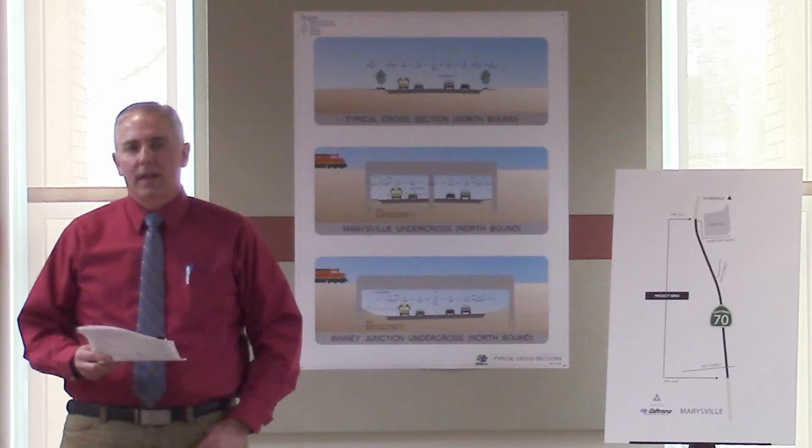I appreciate you tuning in today and watching this presentation. Our goal is to give you some information about this upcoming project and the alternatives that we have so far developed, so you'll understand as a community what those impacts are to the local businesses, the residents, and those people traveling along the state route. So thank you again for your time.

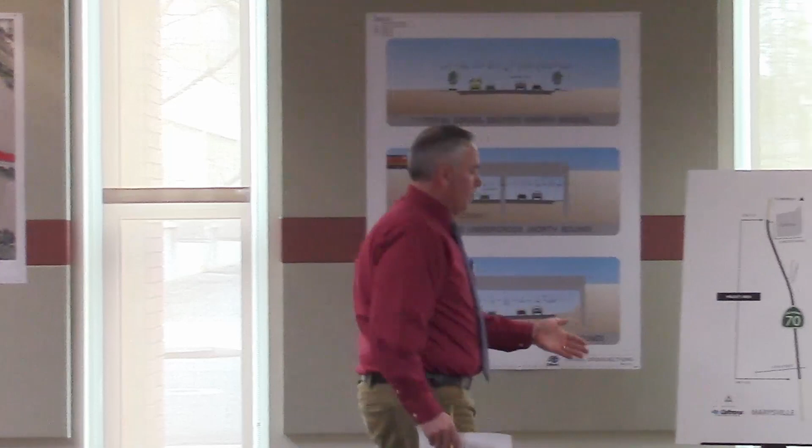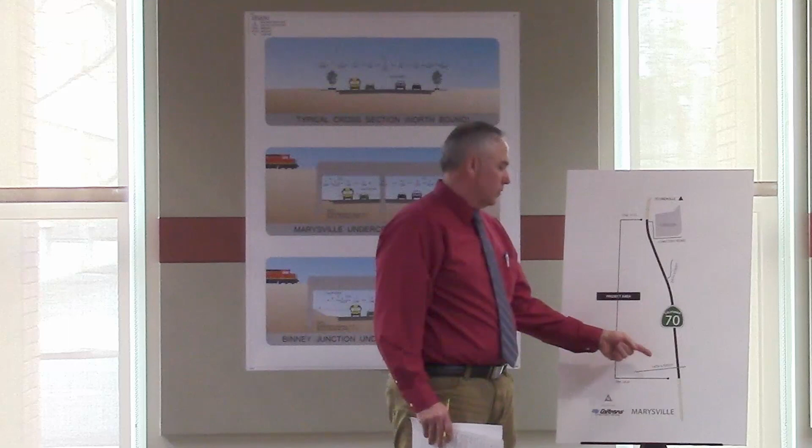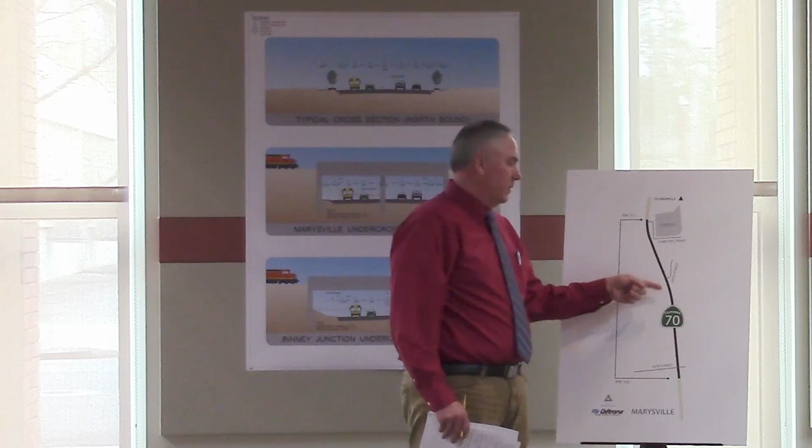So at this time I'll go over the project, where it's located, and the alternatives that we have. This display shows the project limits. It begins just south of 14th Street, where the baseball field is currently, travels north underneath the Marysville undercrossing, the train trestle, or the can opener as it's often referred to. It goes past Marysville High School, the Allen Scott Youth Center, Yuba Sutter Transit, and then underneath the Binney Junction undercrossing. It goes up the Finger Levee and ends just north of the Marysville Cemetery Road access.

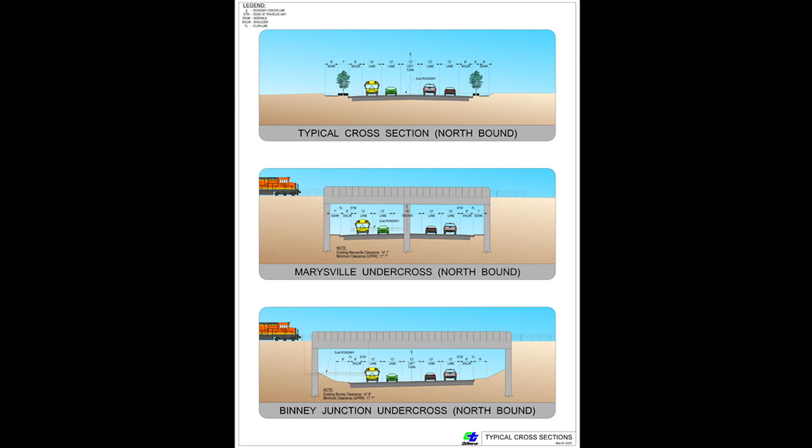So let me give you a general look at the project. The project is going to make operational improvements by having 5 lanes. Currently there is 1 lane in each direction, so we will be adding a 2-way left turn lane, 2 lanes northbound, 8-foot standard shoulders, and 6-foot sidewalks, and then 2 lanes southbound, 8-foot shoulders, and 6-foot sidewalks. We will be replacing the Marysville undercrossing, the can opener, the Marysville train trestle.

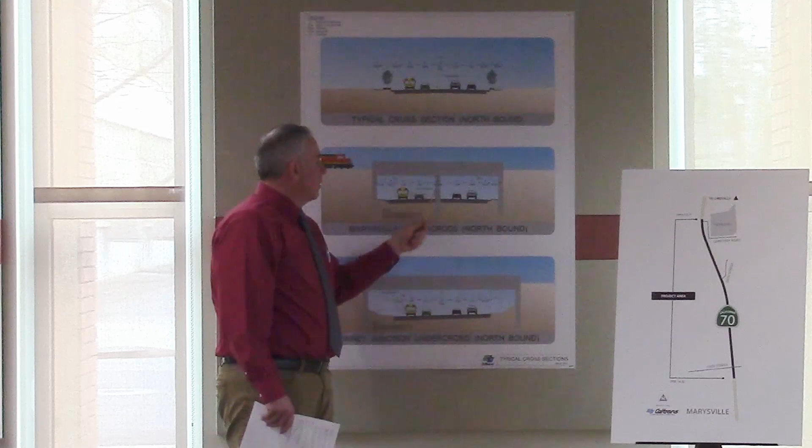The train trestle will be replaced and the roadway depressed to provide 2 12-foot lanes, 8-foot shoulders, and 8-foot or 6-foot sidewalks on both sides of the road. Currently, there are no sidewalks underneath that. There's a tunnel for the pedestrians to use off on the side.

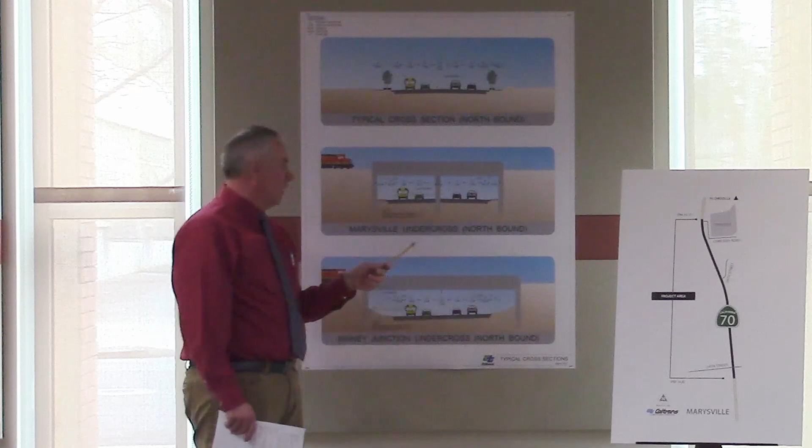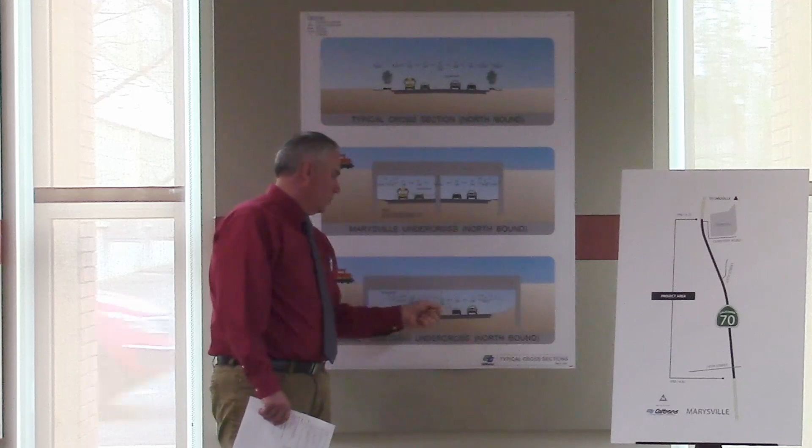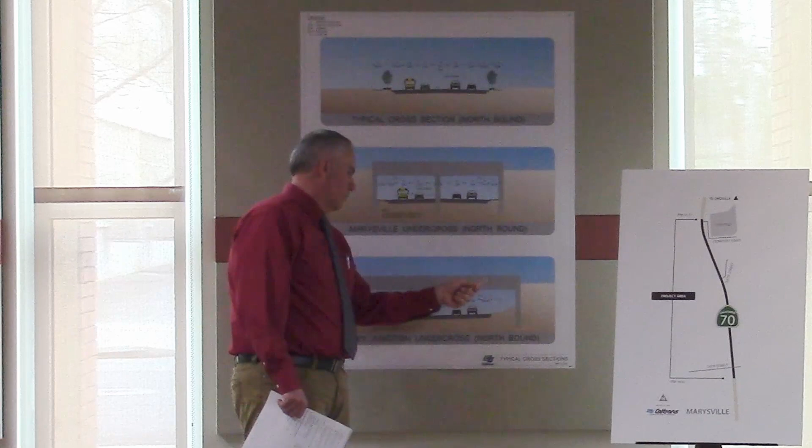It'll go north, and we'll be replacing the Binney Junction structure, with 2 12-foot lanes going underneath that, and once you get through, it will neck down to 3 lanes up by the Marysville Cemetery Road. It will have 8-foot shoulders, and beyond that there won't be sidewalks, but we'll have the shoulders. So that's the typical section. I'll now go over the alternatives and show you what we're looking at.

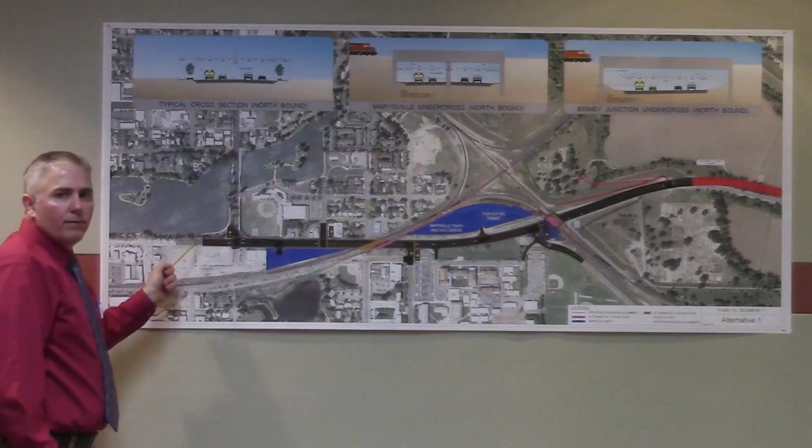So again, the project begins just south of 14th Street. There are existing 5 lanes there, 2 northbound, 2 southbound with a left turn lane. Coming southbound, there's currently only 1 southbound lane and a right turn lane. We will be improving that to have 2 southbound lanes, and that right turn lane will still be there. Northbound will have 2 northbound lanes, 8-foot shoulders, and improved sidewalks.

Going up, 16th Street right now is an uncontrolled intersection, and there's a pedestrian crossing there. We're going to add a signal to help improve that crossing and that access, and there will be left turn lanes, 2 lanes going northbound, 2 southbound.

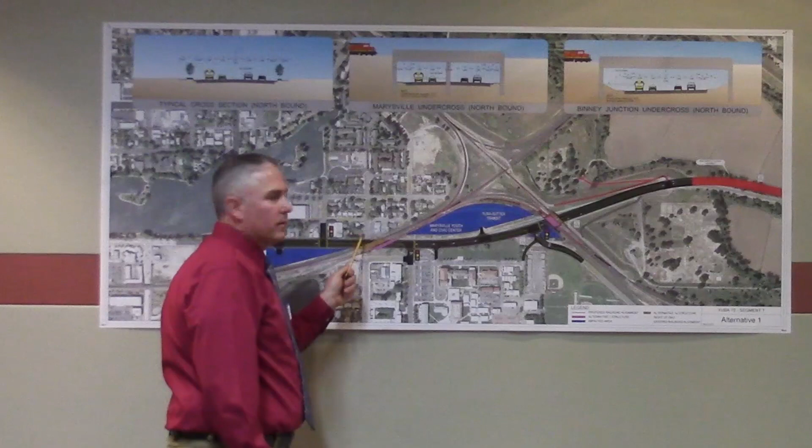Coming up, the roadway will be depressed to provide the vertical clearance underneath the Marysville undercrossing. Because of that depression, access on 17th Street will be eliminated. All that traffic will have to use 16th Street, but it will have that signal to help people exit or enter the state route. And this doesn't have very good access right now anyway.

We will be replacing the Marysville undercrossing train trestle, and to do that we have to have a temporary alignment because we can't stop the trains. So we have a temporary bridge. One of the alternatives is to make this a permanent structure. We're in discussion with Union Pacific on what the final configurations will look like, but we have to provide access for the train while we construct this bridge, and that has to be maintained with as few disruptions as possible.

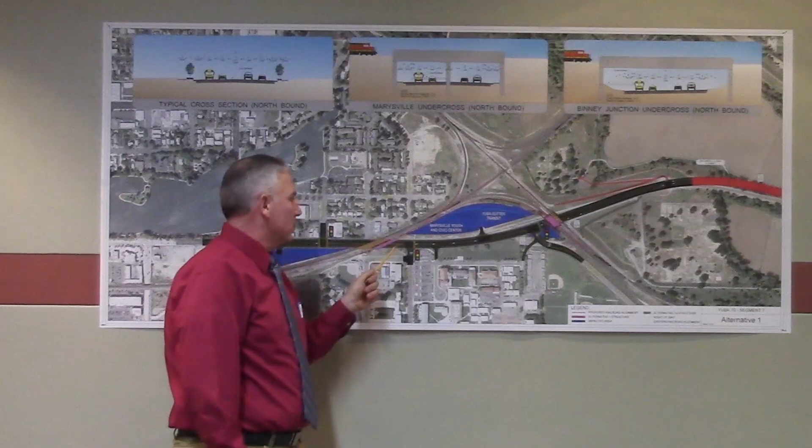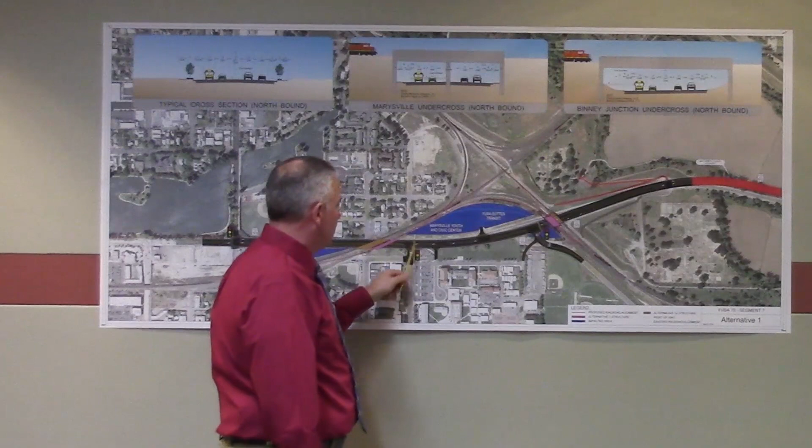So we'll construct that bridge to the north, and it comes around to realign the tracks. Because of that new structure, there will be impacts to the Allen Scott Youth Center and Yuba Sutter Transit with this alternative. The road continues up, and we'll make improvements at 18th Street. There'll be 2 lanes northbound, 2 lanes southbound, with left turn lanes coming into the high school southbound.

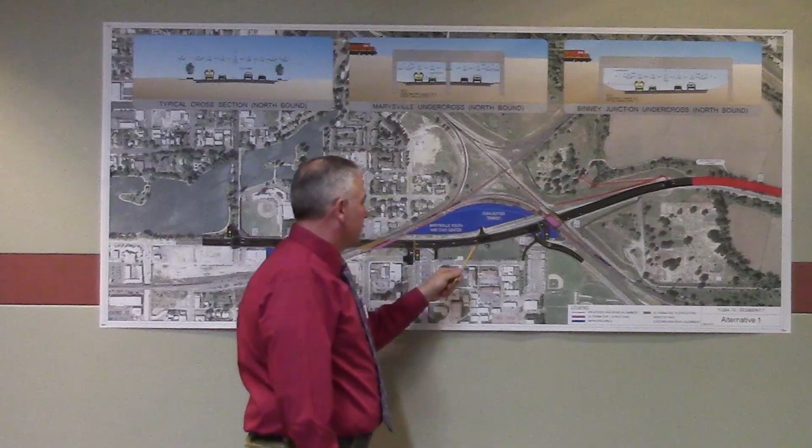We'll provide a bigger left turn into Yuba Sutter Transit, and come up to 24th Street. There will be a signal added at 24th Street. Currently, the demand and the need there warrant a signal and improvements, so that will be done. You'll have 2 left turn lanes out of 24th Street and a right turn lane to go north.

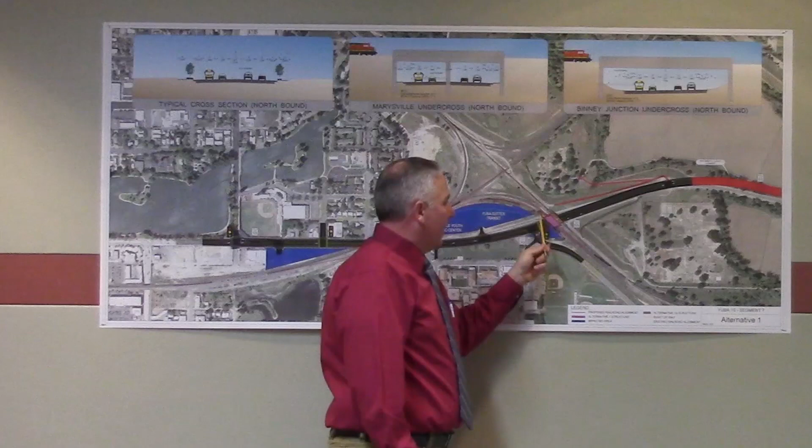And so we'll have 2 lanes here to receive that traffic. So again, 2 lanes southbound, 2 lanes northbound. We'll be replacing the Binney Junction structure. And so again, we have to provide access for the trains to keep the trains moving. So we build a temporary bridge so that we can rebuild the new bridge.

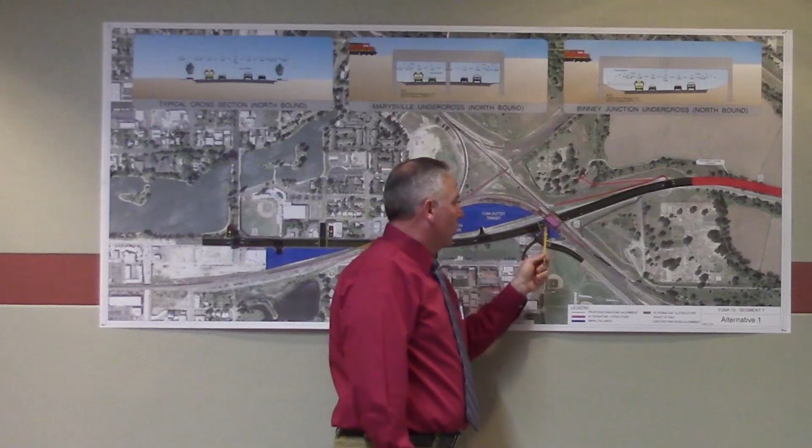And so what that final configuration looks like, again, we're working with the railroad to do that. But the roadway will be depressed to give us the improved vertical clearance. The required clearance under the railroad is a little over 17 feet. So it's a drastic improvement over what both of those roadways currently have. We'll come up and we're going to relocate the east finger levee,

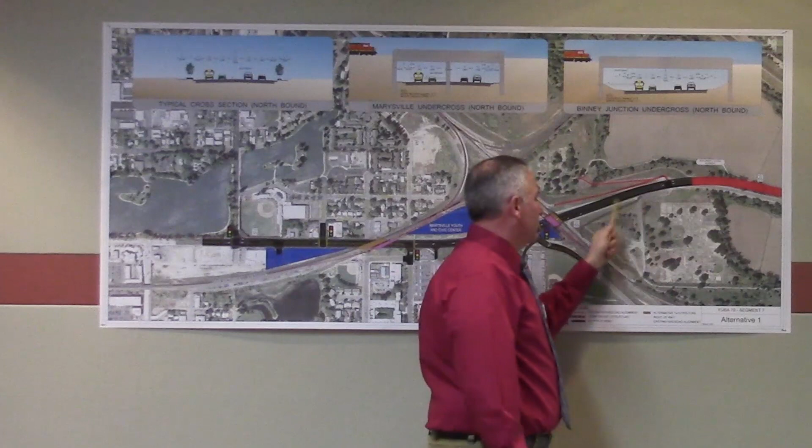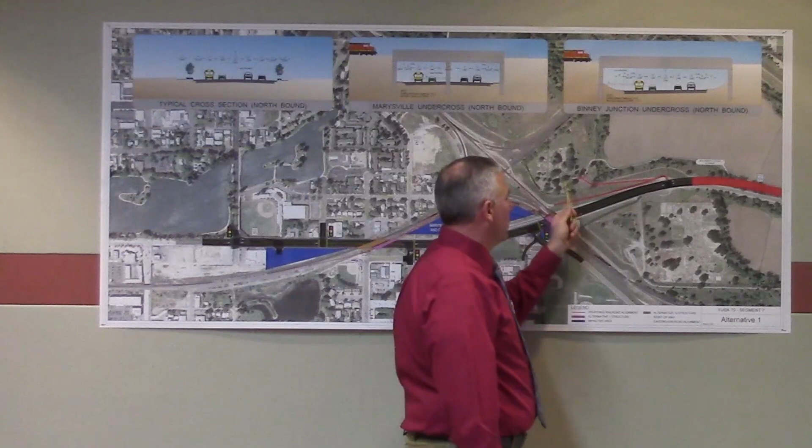and so we'll reconstruct that levee, and the roadway will then narrow down to 3 lanes as it comes. We'll have a left turn lane up there to go to the cemetery, and a left turn lane coming south to enter the historic Marysville Cemetery. This goes to the Catholic Cemetery on the west side of the road.

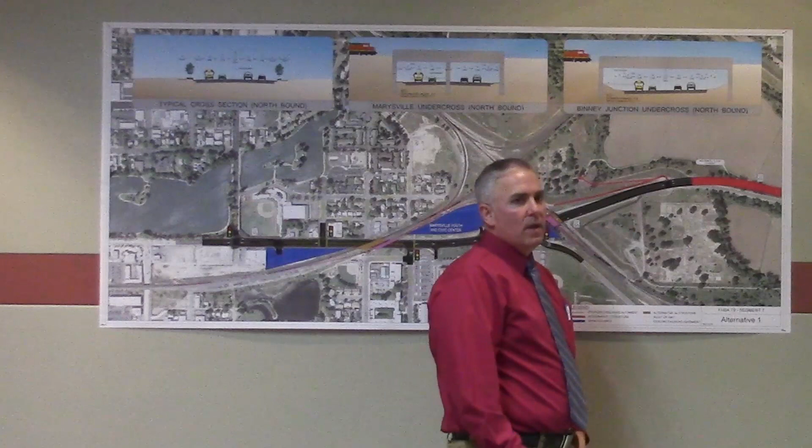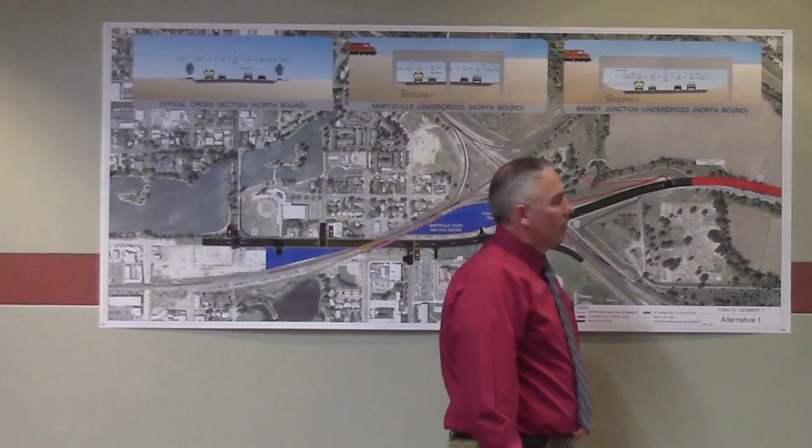This project will tie into the Simmerly Slough project that's under construction right now, and that roadway will be aligned, and that's where ours will finish, where that realignment has taken place, and it will tie into that new Simmerly Slough alignment. So that's alternative 1. I'll now go over and discuss the differences with alternative 2.

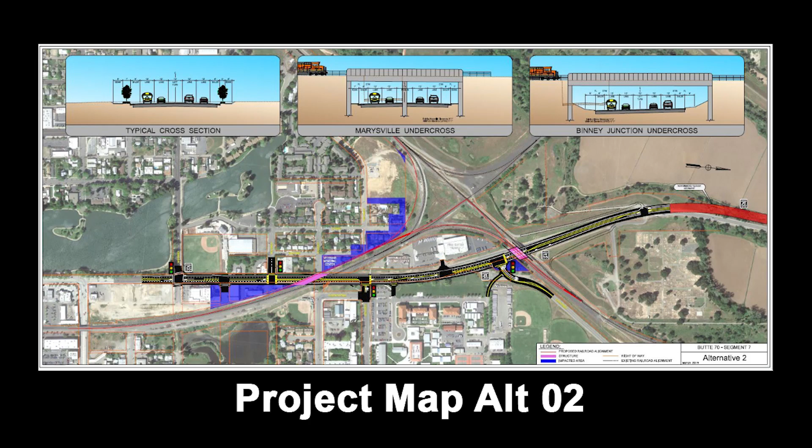Again, the alignment or the footprint of the project is essentially the same for both alternatives. We'll have 5 lanes all the way through, the new signal at 16th Street. The difference between alternative 1 and alternative 2 is this temporary bridge at the Marysville undercrossing. This alternative moves the bridge to the south of the existing Marysville train trestle or can opener.

Move it to the south, and the changes to the impacts on this one, again, we will impact these businesses on the east side of the road, south of the trestle, and then the impacts will be to the Veterans Memorial and some residents indicated in blue, where this alternative will have impacts to.

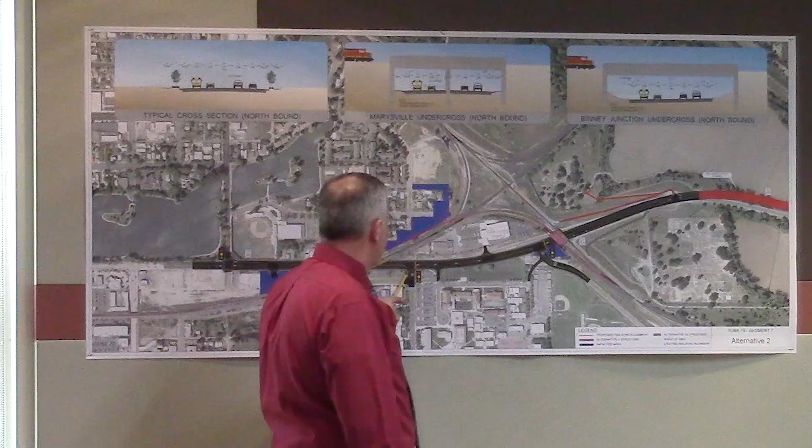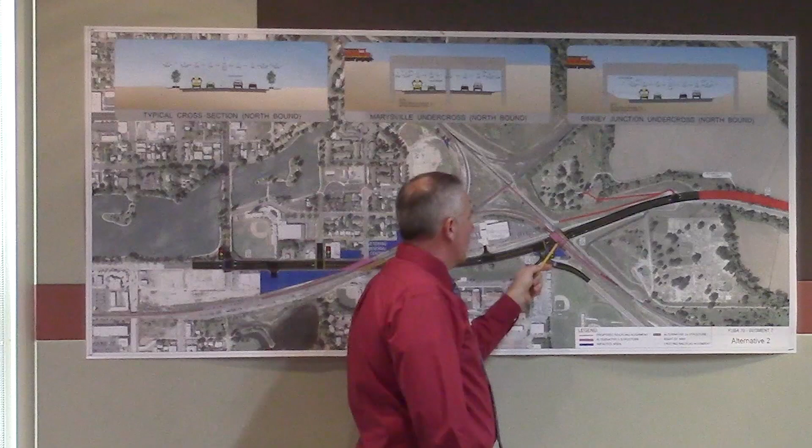It'll come up, and then again we'll fix 18th Street, upgrade that to 2 lanes in each direction, and then 24th Street's the same. Go underneath Binney Junction. We have to build a temporary bridge while we do the replacement. And again, the finger levee will be relocated in the roadway. So both alternatives are roughly the same as far as that.

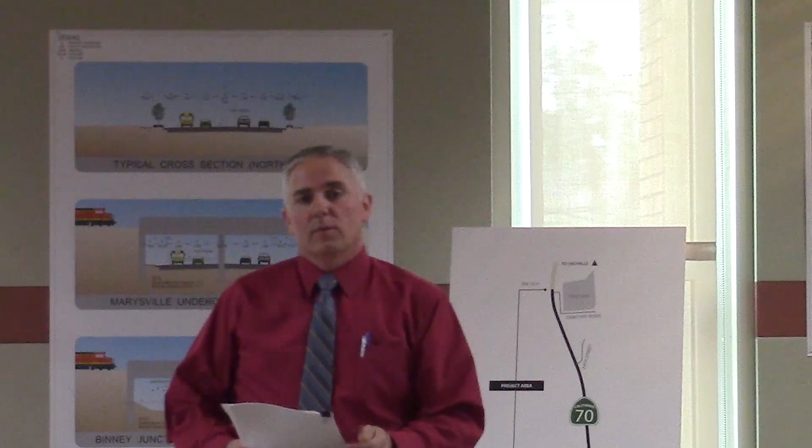The biggest difference is where the temporary trestle and the new structures are built at Marysville Undercrossing and the impacts to that. So the benefits to the project are going to drastically reduce the maintenance costs that we have. The roadway is deteriorating due to the high volume of traffic that we have going in and out of the city. So we will rehabilitate the roadbed and upgrade that to drastically reduce the maintenance costs with the project.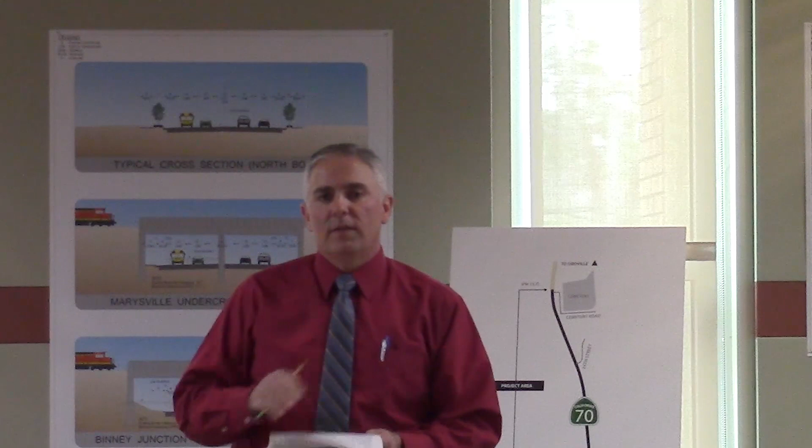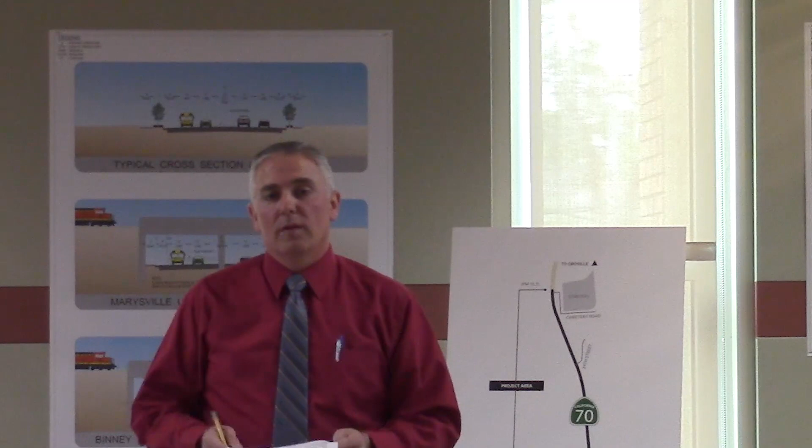Lowering that roadway and giving us the 17 feet of vertical clearance, and widening the road in this structure, will drastically improve freight mobility and being able to get the goods that we move up and down the state through our area. We grow a lot of produce just north of this project, and they need to get their product out to people so they can buy it. So it's a drastic improvement for that.

It'll make the road safer and more comfortable to drive because you won't be squeezed through the train trestles, and it'll improve operations. We'll be able to get people in and out of the city much faster and better. Also, safe routes to school. Currently, like I talked about, there's no access. We don't have sidewalks at all on the west side through a large portion of this project.

And if you're riding a bike and you want to ride through, you either have to get up on the sidewalk and go under a tunnel with the pedestrians, or drive through the train bridges, which is not too comfortable. There's no shoulders there. So it'll improve safety. As I stated, all the facilities will be upgraded to current Americans with Disabilities Act requirements, and we will be meeting all the current safe routes to school standards.

The cost for the project is roughly $111 million, and the schedule, we are working currently on the draft environmental document. We hope to have that published the first part of July, and we will plan on having another public open house sometime towards the end of July. The project is scheduled to begin construction currently summer of 2022, with project completion sometime in the winter of 2025. So that's the current schedule.